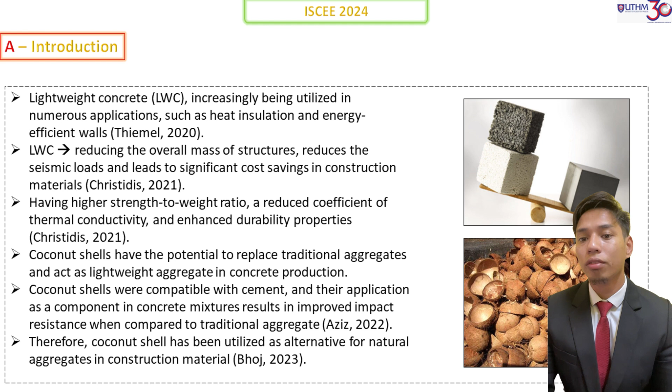Next, coconut shells also have the potential to replace the traditional aggregate and act as lightweight aggregate in concrete production. Therefore, coconut shell has been utilized as an alternative for natural aggregates in construction materials. In this study, POFA and Metakaolin are used as a partial cement replacement, as POFA is a solid waste produced from the palm oil mill manufacturing process.

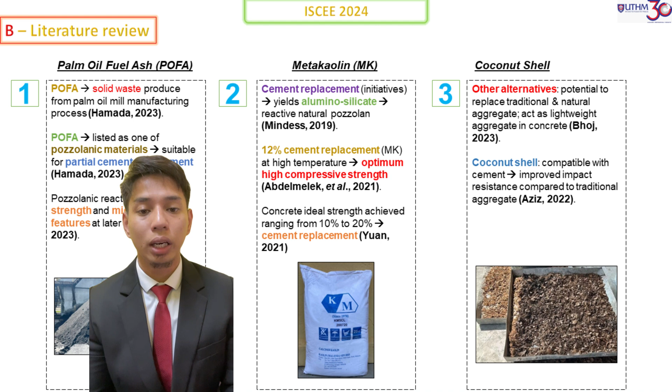POFA is also listed as one of the pozzolanic materials which is suitable for partial cement replacement. Pozzolanic reaction will improve the strength and microstructural features at later age. This is due to POFA being rich in silica content. Metakaolin is an initiative for cement replacement. Metakaolin yields aluminosilicate and it is also listed as a reactive natural pozzolan. Concrete ideal strength is achieved ranging from 10 to 20% using Metakaolin as a cement replacement.

For coconut shell, it is another alternative. It has the potential to replace traditional and natural aggregate, acting as a lightweight aggregate in concrete. So coconut shell is compatible with cement and improves the impact resistance compared to the traditional aggregate. This information is according to Aziz, 2022.

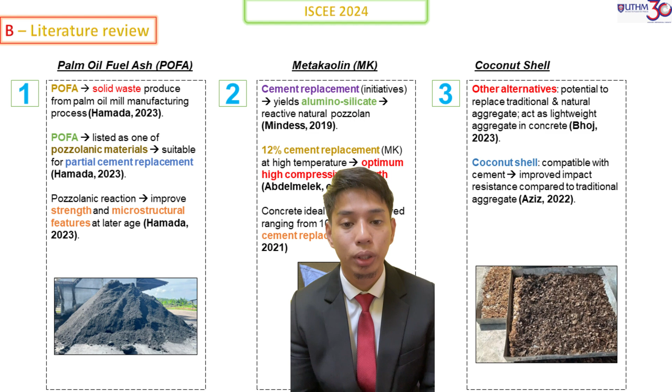For Metakaolin, the percentage of Metakaolin used is 10% fixed. For fine aggregate, 100% is used and used directly. For coarse aggregate, it goes through the process of passing through 10 mm and retained at 5 mm. The percentage of coarse aggregate used is 50% because the other 50% will be replaced with coconut shell, which is crushed coconut shell passing through 14 mm.

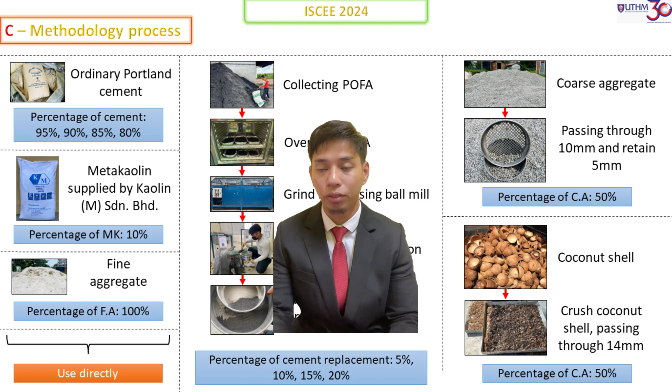So this is the design mix. P0 is 0% of POFA, P5 is 5% of POFA as a cement replacement, P10 is 10%, P15 is 15%, and lastly P20 is 20%. For P0 it is 0 kg of POFA, P5 with 5% of POFA is 20 kg of POFA. This table is per meter cube. For coarse aggregate, 50% is used, which is 565 kg per meter cube, and coconut shell use is 50%, which is 270 kg per meter cube.

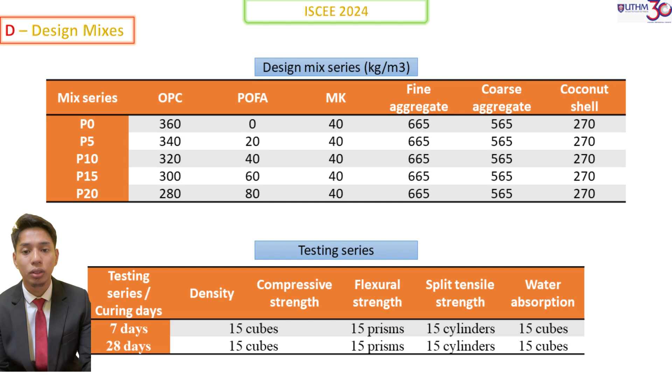This is the testing series, starting with the density, compressive strength, flexural strength, split tensile strength, and lastly the water absorption. This is the total of the samples for the testing series.

So this is the result for the slump test. The highest slump recorded is 55 mm and belongs to P0, which is 0% POFA replacement. And the lowest slump is recorded as 39 mm and it belongs to P20, which is the highest replacement of POFA, 20%. So there is a consistent decrease pattern as shown in the graph as POFA content increases. So increasing POFA content will reduce the workability of concrete. This is due to the significant amount of unburned carbon that will absorb water and reduce the workability.

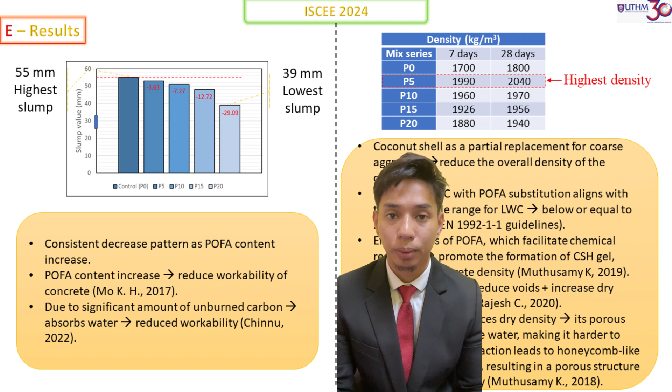So this is the result of density of concrete for each mix. The highest density belongs to P5, which used 5% of POFA as partial cement replacement. The coconut shell as a partial replacement for coarse aggregate will reduce the overall density of the concrete. Density of LWC with POFA substitution aligns with the acceptable range for LWC, which is below or equal to 2,200 kg per meter cube.

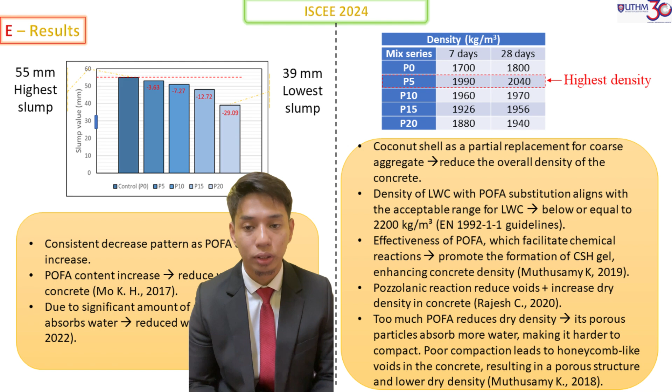The effectiveness of POFA facilitates the chemical reaction known as pozzolanic reaction, which promotes the formation of calcium silicate hydrate gel, enhancing the concrete density. So the pozzolanic reaction reduces the voids and increases the dry density of concrete. But too much POFA will reduce the dry density because its porous particles absorb more water, making it harder to compact. And if the compaction is poor, it will lead to honeycomb-like voids in the concrete, resulting in a porous structure and lower dry density.

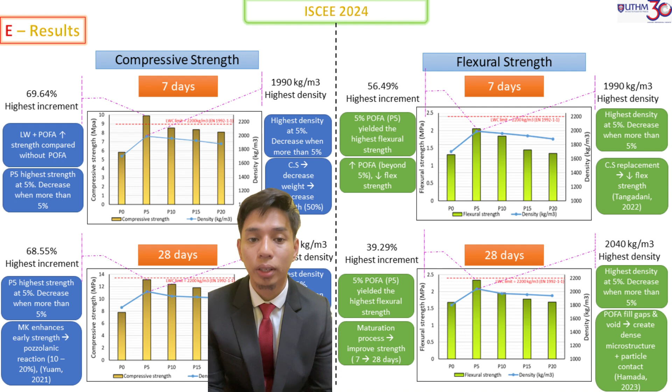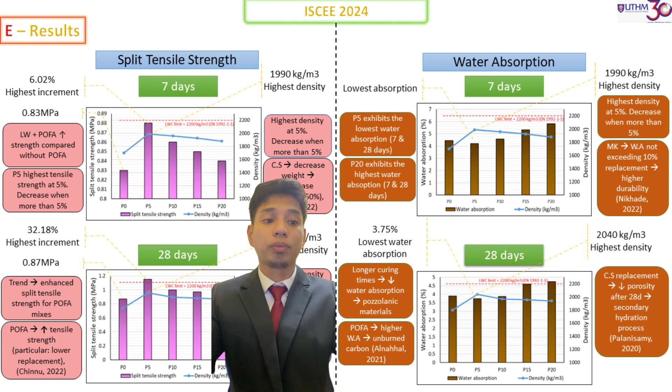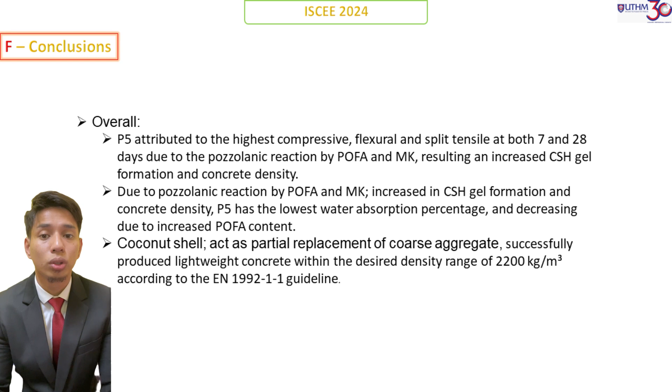Coconut shell, acting as a partial coarse aggregate replacement, successfully produced lightweight concrete within the desired density range of 2,200 kg per meter cube according to the EN guidelines.